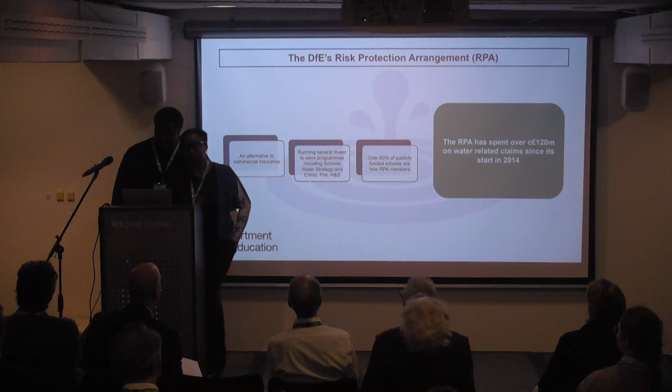I'll do this slide for you if you want. Okay, if we look at who we are, we are part of the schools water strategy, as my colleague just said. So essentially, about 12 years ago, the DfE put together a risk protection arrangement that is an alternative to commercial insurance for schools. In that, they've got several programs running. They've got programs that look at security, programs that look at strategy in terms of crime, fire, health and safety, but also in that we look at water. We look at damage that has been caused to our buildings because of water damage.

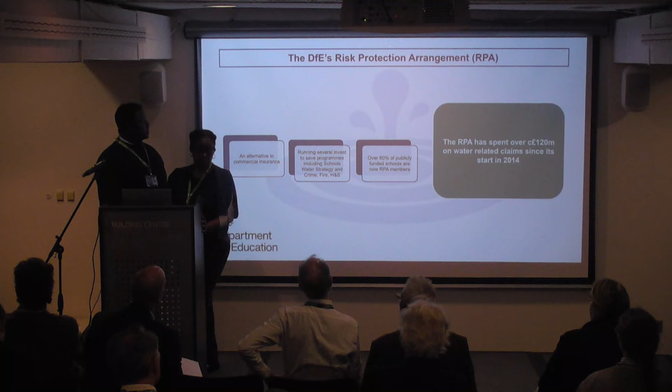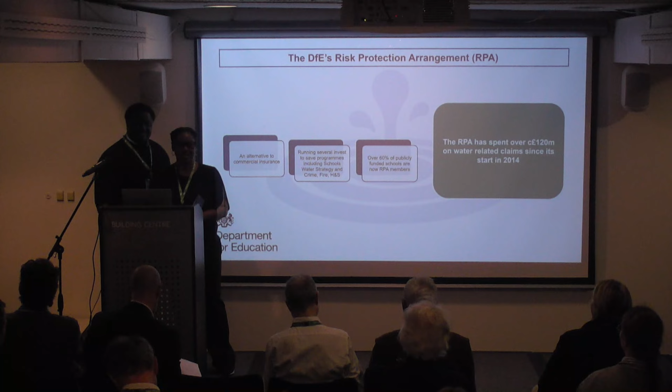Currently, over 60% of state-funded schools are now members of the RPA. So that shows that we have got a large market and a large proportion of people that are interested in the services that we provide. And since its inception in 2014, the RPA has spent over 120 million on water-related claims.

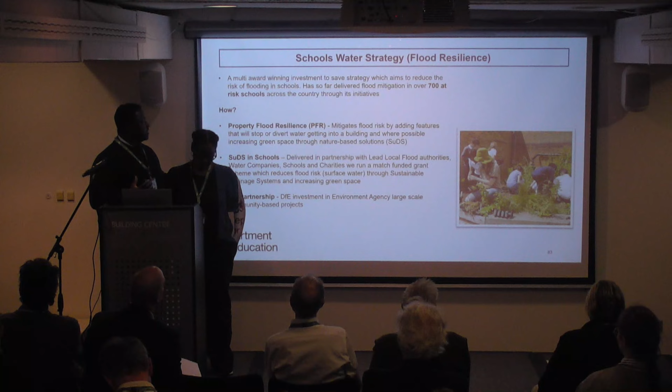Okay, as part of the school water strategy, there are three work streams. Most of the people in this room will be aware of the SuDS in Schools project. We also have the property flood resilience work stream and also the EA partnership as well. In combination, we've delivered flood mitigation in over 700 schools at risk across the country through its initiatives.

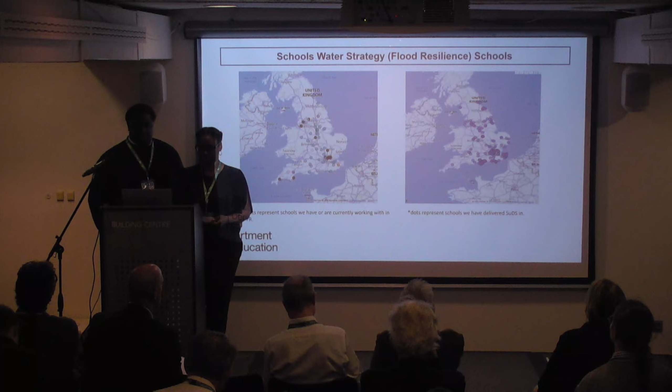And this is just a pictorial representation of the different regions in England our projects cover. The one to my left, which will be to your right, is reflective of SuDS. And I'm sure we could add some additional dots on there since this slide was created a few months ago. And the one to my right is the property flood resilience, and we're planning on scaling up the service on both fronts, which we'll talk about on a later slide. On to the next one, Charlene. Yeah.

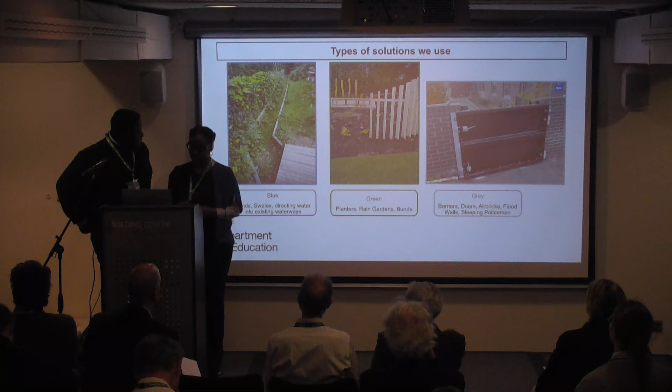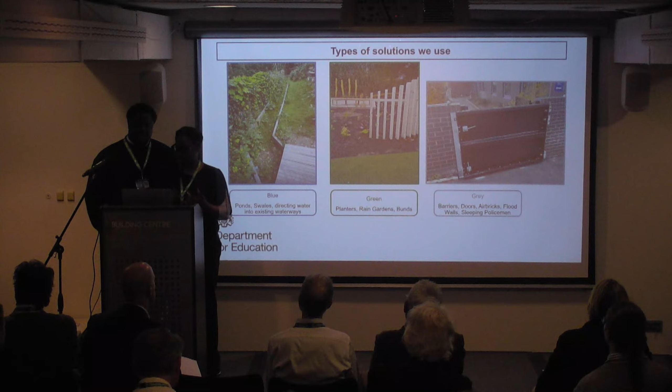So there are different solutions that we offer. We've got the blue solutions that everyone's aware of, the traditional ponds and swales that direct water away into existing waterways. We've then got green solutions that everyone is also aware of, planters, rain gardens. And then we've got the grey, which is the harder stuff: the barriers, the doors, the air bricks, the flood walls, and the sleeping policemen.

Yeah, cheers. Thanks, Charlene. And just to mention, as part of the SuDS in Schools program, we only do the blue and green. And for the property flood resilience, it's a holistic approach, so we consider the grey infrastructure as well.

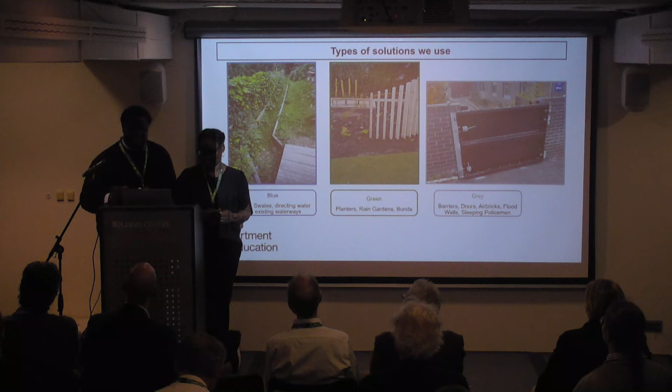And this is a fun fact I meant to mention at the beginning of my presentation. Myself and the microphone have a love-hate relationship; for some reason it doesn't pick up my voice. So if you can't hear me, please give me a wave and I'll come closer. Please, yeah. I'm not trying to be silent or mysterious by any means.

So go to the next one. This is a case study from one of our schools that we've delivered through property flood resilience. I'm highlighting a few of the case studies in the slides as we go along. This particular school experienced very devastating flooding a few years before it came on our books, with different authorities getting involved in getting pupils out of the school.

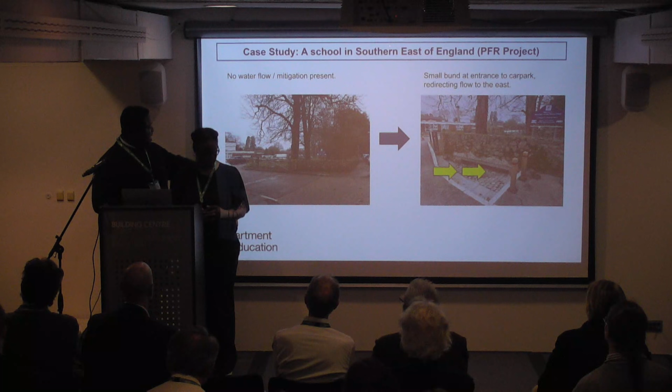Since we onboarded them through property flood resilience, we've been able to put certain infrastructure on the school site. One of the elements is installing a small bund at the entrance of the car park that redirects the flow to the east and to the other features that we installed on the school grounds. As part of that as well, we expanded the car park roadway that you can see here, to take that into account. Sorry.

Who can tell we're winging it?

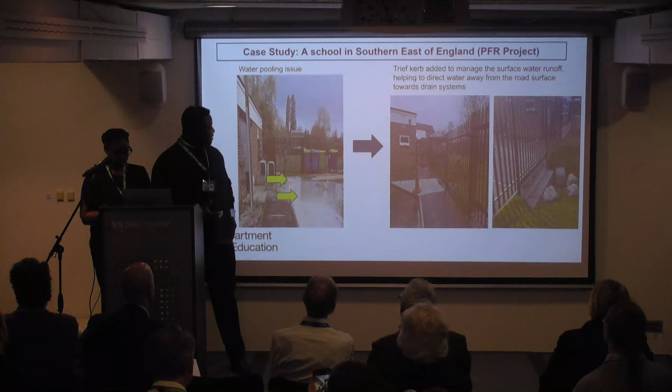Yeah, myself and Charlene. And also in terms of installing our infrastructure where water pools, to basically integrate the infrastructure into the day-to-day of the school to prevent this scenario from happening. Again, this is under one of our projects, more in the SuDS in schools space. This just shows what we can do in terms of the school estate.

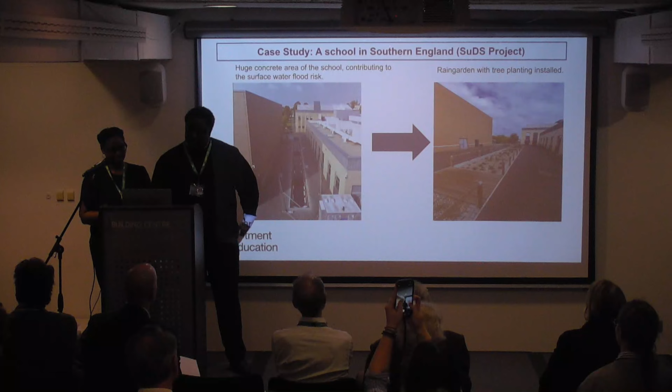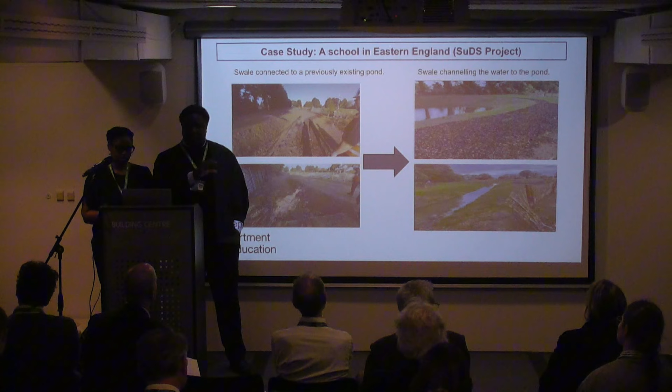So this was a large concreted area, and you can see we were able to install rain gardens, which were planted, and that's just one of many features we were able to install on that school site. In addition, this is one of our projects more on the SuDS front that takes an element of what we described in terms of the blue, conveying the water. The pond already existed on the school ground, but we were able to design features that connect to existing features on the school ground.

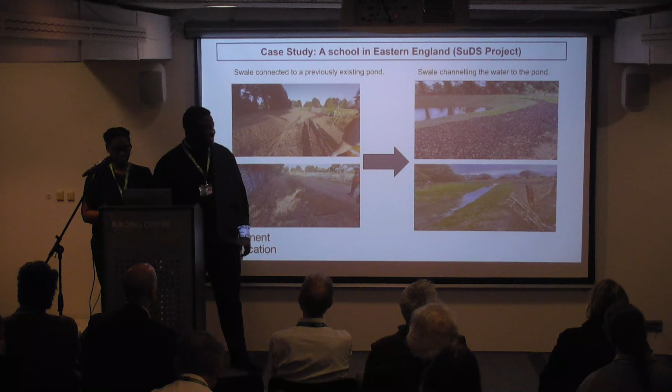I would say ignore the fence on the far left. That wasn't installed as part of the project. I'm sure when I visited there were talks about replacing that fence, but I couldn't get updated pictures in time.

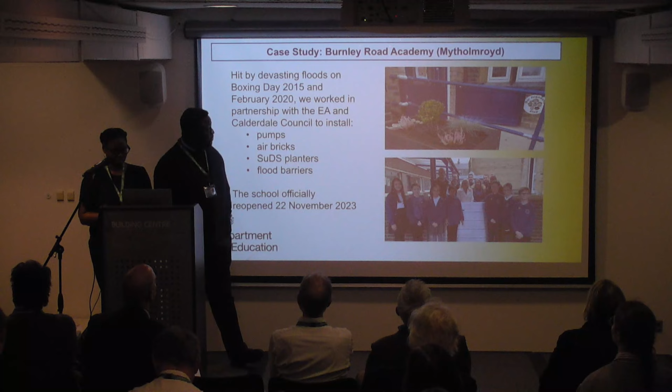Again, this is one of our schools, more on the PFR and in partnership with the EA, in Burnley Road. They were hit with devastating flooding on Boxing Day, which necessitated the school closure. But we worked with the EA and Calderdale Council to install different pumps, air bricks, SuDS planters, flood barriers, and the school officially reopened in 2023.

This actually predates my involvement in the school water strategy, but you can see a couple of my colleagues trying to smile awkwardly. But my smile is always awkward as well.

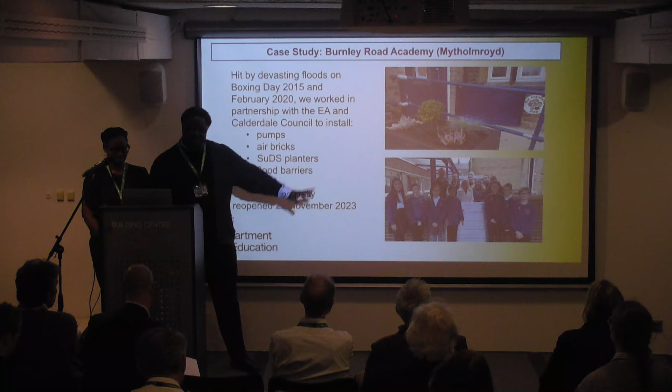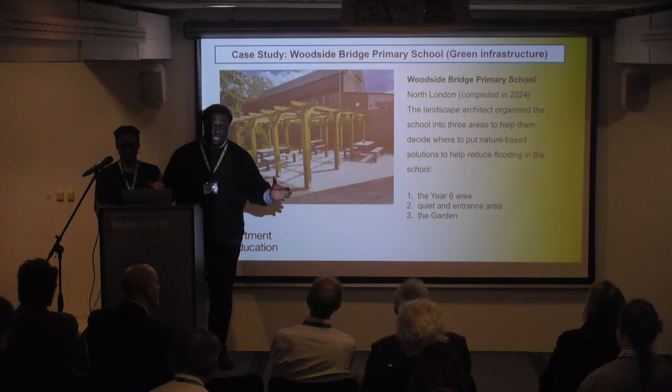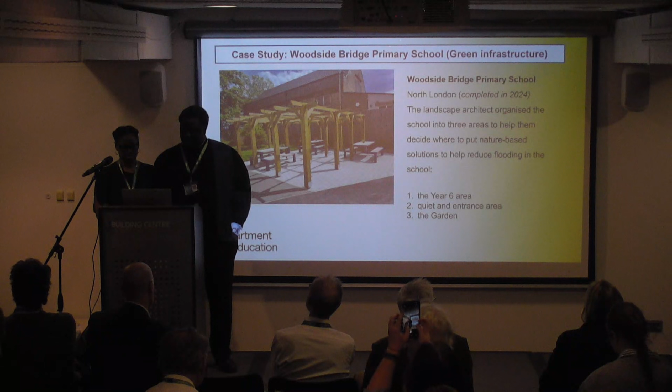So if we move on, next is one of our green infrastructure projects at Woodside Bridge Primary School. This was part of property flood resilience, a sub-branch to see what we can do in the green infrastructure space. We tried to install different SuDS and blue infrastructure in key areas on the school site, which also incorporates into the outdoor learning space of the pupils, which one of the pictures depicts, in addition to mitigating the flood risk as well.

Nature-based solutions. This is Eden Park Primary School under one of our green infrastructure projects. In addition to the planters, we were able to install something I've been describing as a rainfall ladder, I'm sure there's a more technical way to put it, which connects into a planter that was installed. I wish I had the picture on here, but it was quite genius on the part of the designers who developed that initiative.

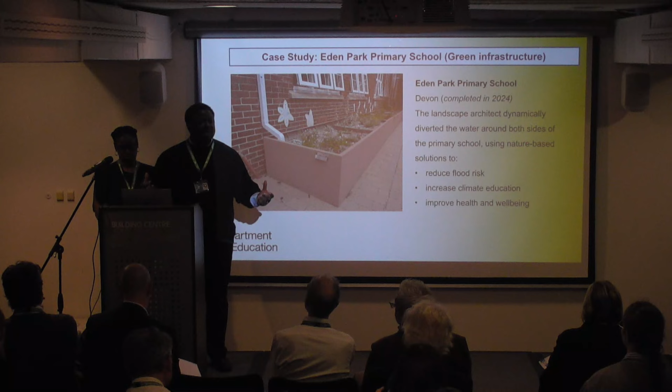And the school was very happy with that, because those areas usually pool with water, but installing this infrastructure allows that risk to be mitigated significantly, and also allows the adoption element, which we try to incorporate into our projects, because there's no value in installing features where you go five years down the line and the maintenance is not up to date.

Again, some elements of the wider project benefit. There's community benefit and educational benefit, as you would imagine coming from the Department for Education. I hope you're not surprised about the educational benefit element. There's the community benefit: adapting to climate change by providing urban cooling, helping to address issues of social inequality, making better places to live and also to learn.

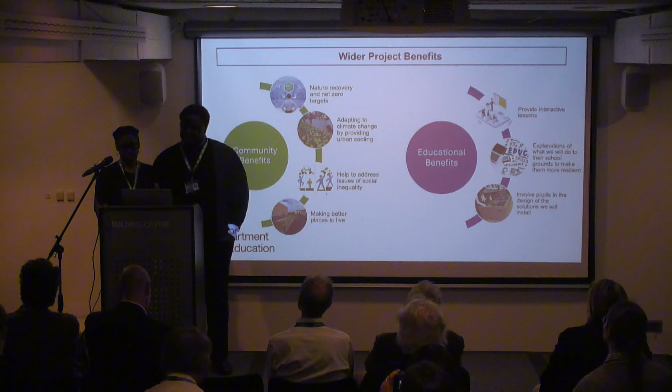There's the educational benefit in terms of providing interactive lessons, like I mentioned earlier, and involving pupils in the designs of the solutions we install. I've seen videos where the kids explain what SuDS planters do better than I can, and because I approach this mostly from a project management background, it makes it very rewarding when you see those kids getting stuck in.

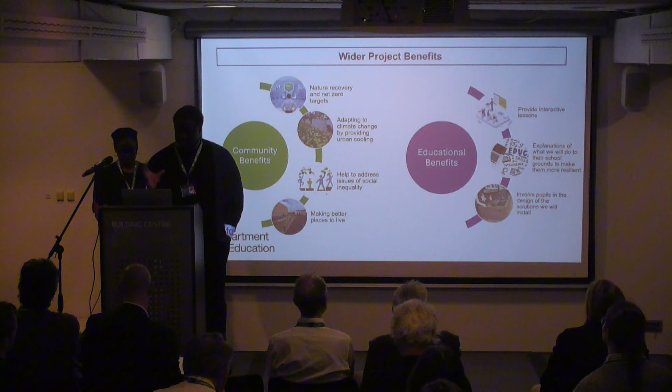Again, it doesn't come without its challenges, as you would all know. Obviously, weather is one that we face; the climate has been talked about in terms of how to mitigate against that. We do different kinds of strategies with our delivery partners, but that's one of the biggies.

Limitation on delivery installation time frame due to budget constraints. For my program, budgets are tied to financial years, and any slippage is always a challenge to manage within my program, which is more of the boring element. Delivery stakeholders and even schools might not really understand too much the nuances in that element. Engaging with all the relevant stakeholders as well.

We've had cases where we've gotten in touch with the school, but the school hasn't passed on our communications to the landowner, for example the diocese. So we ensure that we get every stakeholder involved from the kickoff to avoid any scope creep or any change in plans later on.

School access is also a big one. We work with Meristem and different delivery providers in terms of getting times to actually go and install these features. You aim for key holidays, i.e. summer, which is the big one, the February half terms and the October holidays. And some schools do value installation during term time as well, because they get the pupils involved and seeing different professions on the school site. So school access is one of the challenges we face as well.

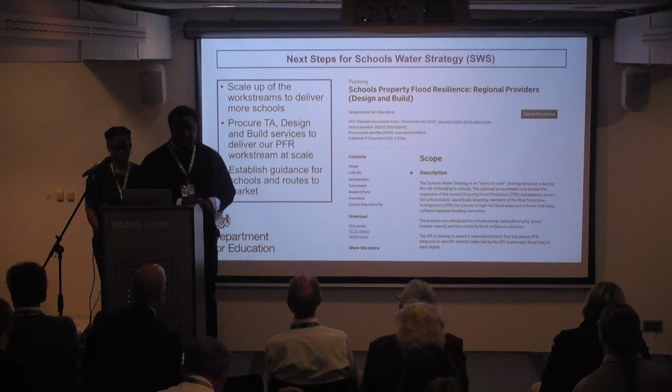At the moment we have a tender, which I just got confirmation of as I was coming, that's out of the press, basically. It's now live to procure a design and build service to deliver our PFR workstream at scale. And we're looking at establishing guidance for schools and routes to market. That's currently in the pipeline as well.